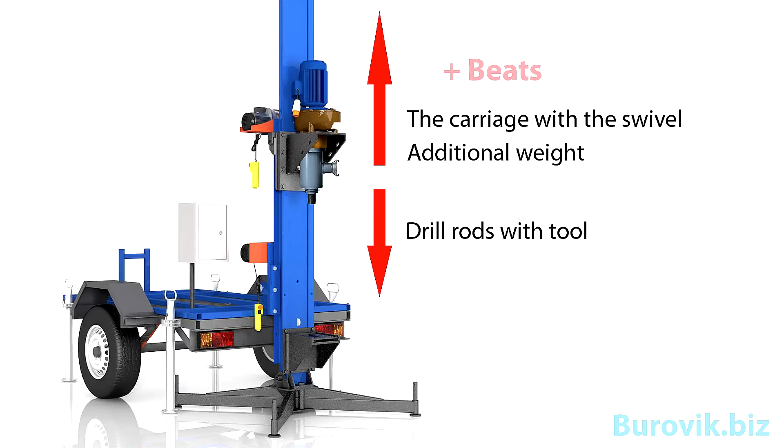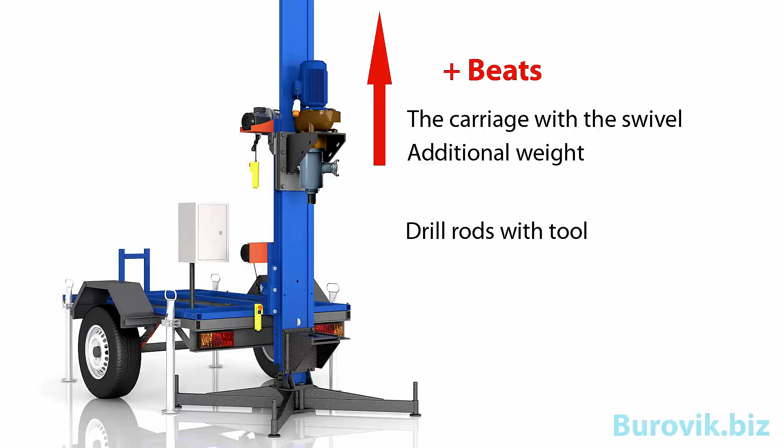Swivel accepts heavy loads, and their greatest value is directed along the axis. This is the weight of the drill rods with tools, and the weight of the carriage with the swivel. Quite often the carriage is additionally loaded to increase the pressure on the bit. The amount of load increases greatly from shocks and vibrations, especially during the passage of solid rock. Also, the direction of impact is constantly changing. Thus, the first requirement: bearings must be resistant to axial loads.

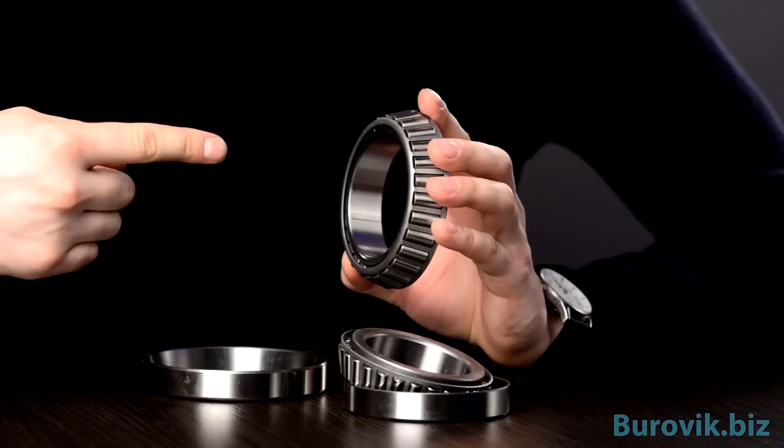In my swivel, I used tapered roller bearings. They can take an axial and radial load. They are resistant to excessive shocks and vibrations. Other swivel manufacturers use radial bearings. However, operation experience shows that the radial bearings are destroyed because of bumps.

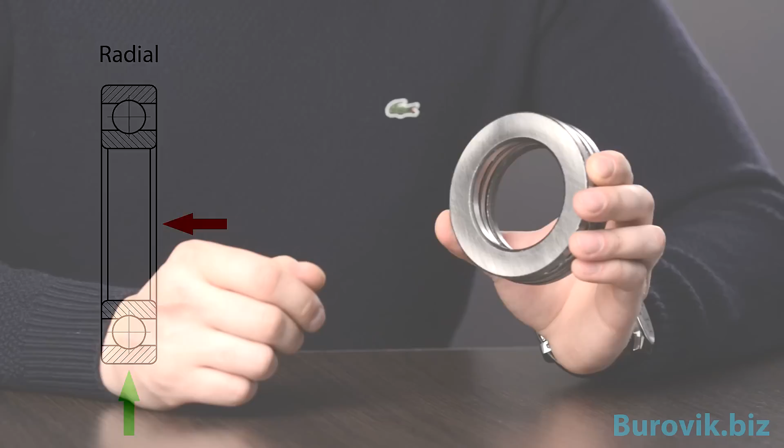Sometimes it is necessary to stop drilling because of bearing crash. The problem is not in the bearing as such. It just cannot take the axial load. Radial bearing works only with the radial load. Thrust bearing only with axial load. Only roller cone bearing can take both loads. The axial load is changing direction, so these bearings should be used in tandem.

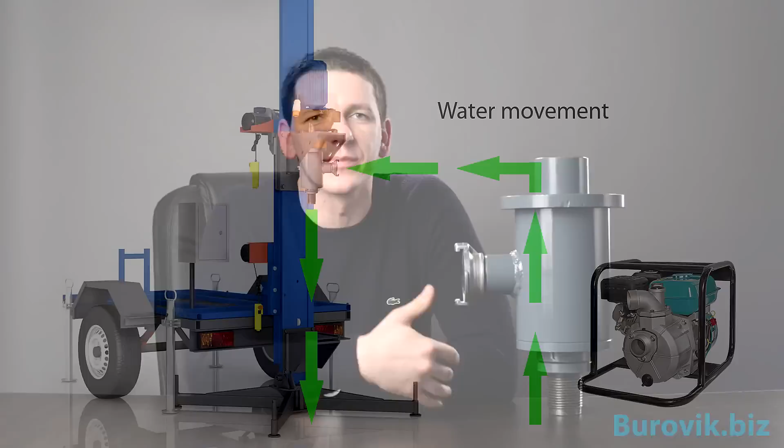During drilling, it is necessary to pump water into the well bore. In most cases, the water circulates like this: it is fed into the well at the drilling zone, and then rises together with the rock to the surface, after which the same water with the grit is fed into the well again, and then the circle is repeated. At the same time, the swivel should not flow.

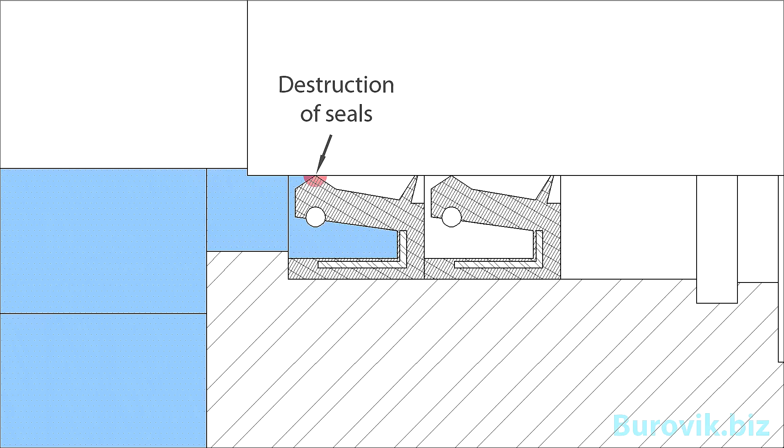Abrasive particles, which are contained in the water, have the most detrimental influence. The seals are destroyed upon the first contact. In the field of friction on the surface of the shaft, grooves can be formed. Thus, the second requirement: the seals and the shaft must be resistant to abrasive particles.

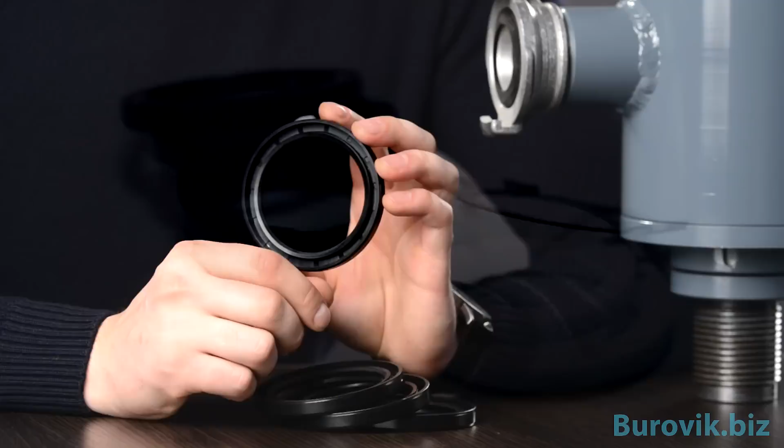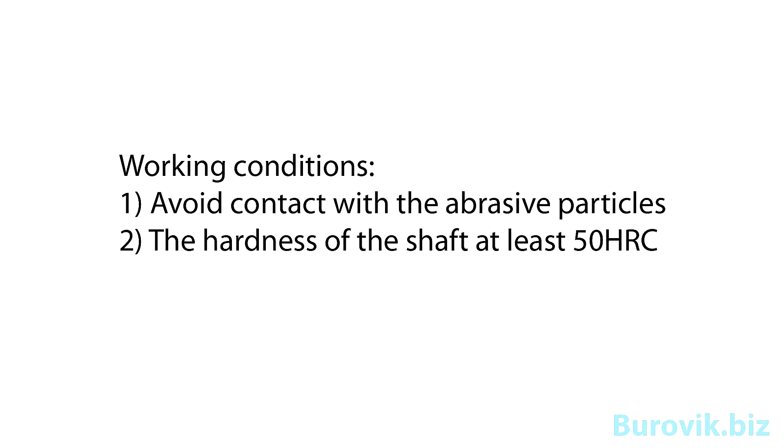The seals are two-board reinforced cuffs. They cope well with their task, but only preserved in several conditions. They should not be in contact with the abrasive particles. The shaft should have greater hardness. The surface of the shaft must be ground to a mirror state.

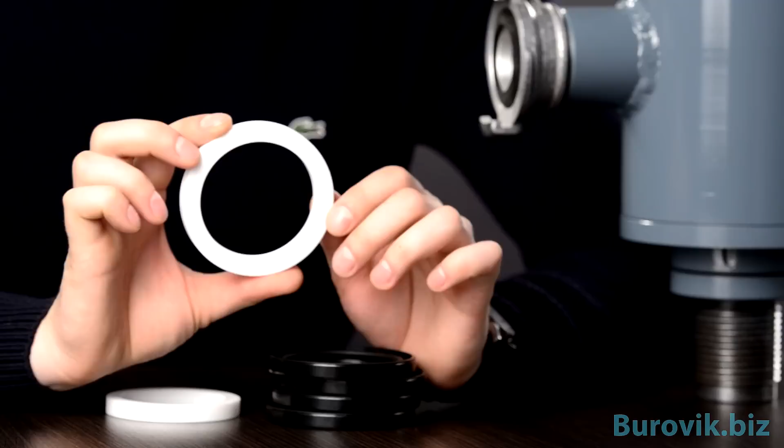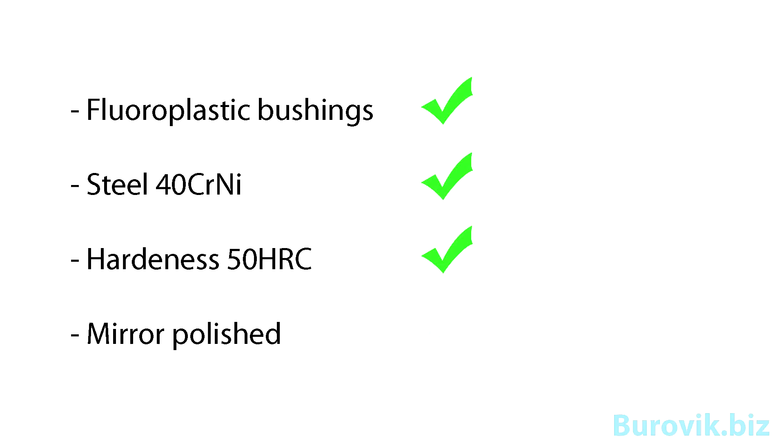How to protect the cuff from the effect of sand? To do this, special fluoroplastic bushings must be used. This is the first and most important barrier. They have interference fit on the shaft and the body. In my swivel, I used alloyed steel with hardening of 50 Rockwell units, then polishing to a mirror surface. As a result, the cuffs work in ideal conditions. The service life of the swivel increases by 7-8 times.

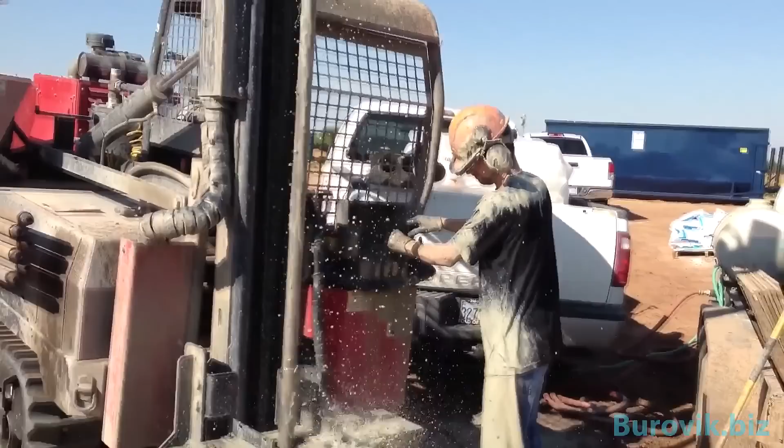The swivel must work for a long time without maintenance. The swivel should not take your time during drilling or after it. It should work on the principle of install and forget. Most swivels from other manufacturers are constantly flowing. You must change the seals after each well and regularly audit bearings.

How does my swivel work? You install the swivel and forget about it for a long time.

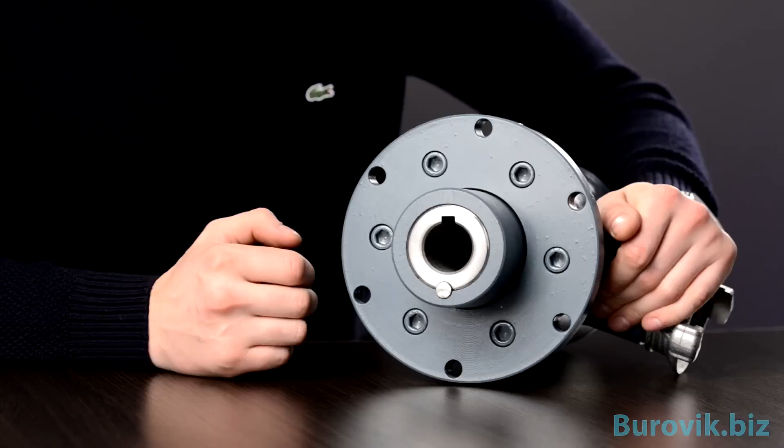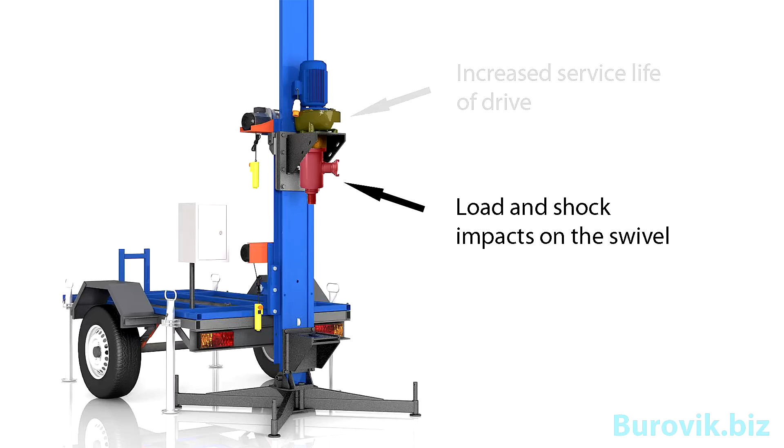To install the swivel on a drilling rig, there is a massive flange with mounting holes. The swivel is rigidly connected to the rig carriage. Thus, the entire load, vibration and shock impact on the swivel. At the same time, the motor does not suffer.

To connect the swivel with different drilling rigs, a universal bushing was designed, which is inserted into the swivel's shaft. Inside the bushing there is connection to the motor. It can be keyed, splined, square, hexagonal, etc. When ordering the swivel, you can choose your option. For a non-standard connection, you get a solid bushing, where you can make your own connection.

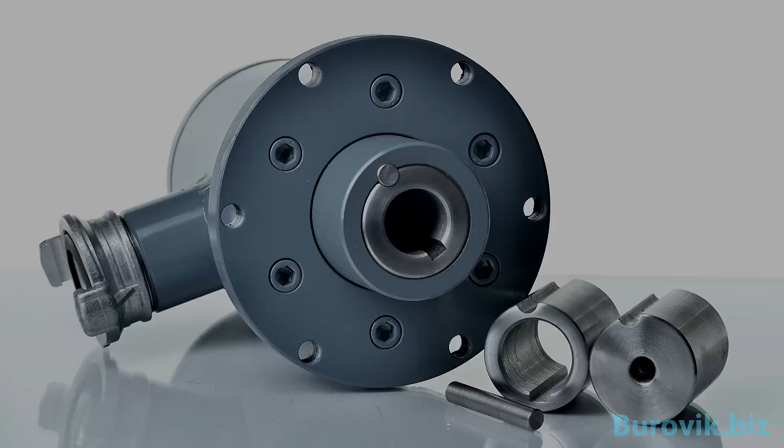The connection to the drill rod is with an adapter. There is a body for cutting specific thread. During reverse rotation, the adapter is not unscrewed, due to a special locking mechanism.